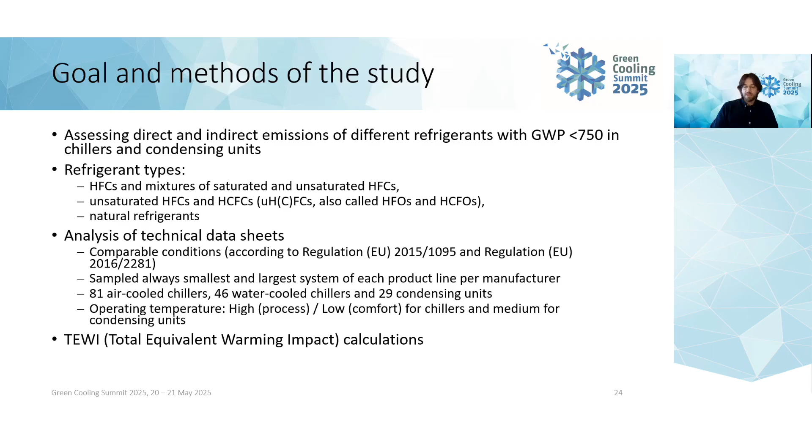The metric that we looked at, and that's also where we needed all the information, was the total equivalent warming impact. This is what we wanted to calculate. It looks very big now, but it's simply the direct emissions plus the indirect emissions. The direct emissions are the amount of refrigerant that emits from a system over the lifetime and at end of life. These emissions are summed up and multiplied with the GWP to get a value in CO2 equivalents. Then you add the indirect emissions, which are the emissions from the electrical energy generation to power the compressor, also over the entire lifetime.

With this, you get the TEWI, which is not really the total warming impact, because some sources are missing. We looked into this later for the paper, but the TEWI captures a lot, so that's why we opted for it. The data we gathered was based on technical data sheet information and some published information, but also certain assumptions. You can go through the assumptions in detail; they're also in the report, but you might conclude you would have picked a different value. That's totally fair, and that's why I did some simulations to look into the impact of these assumptions and see whether they would change the result.

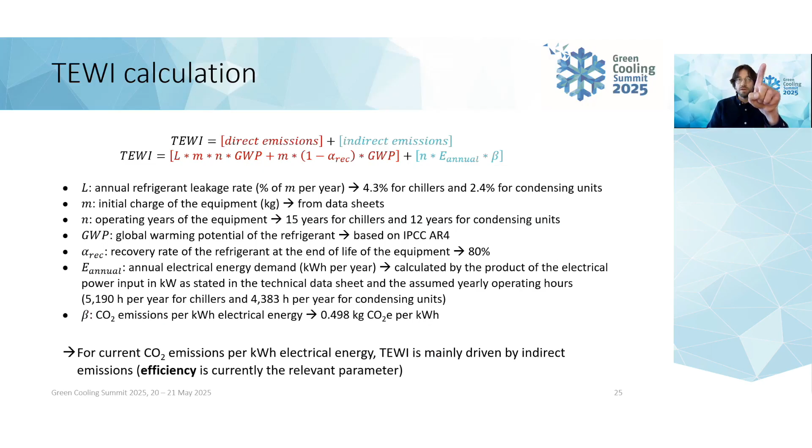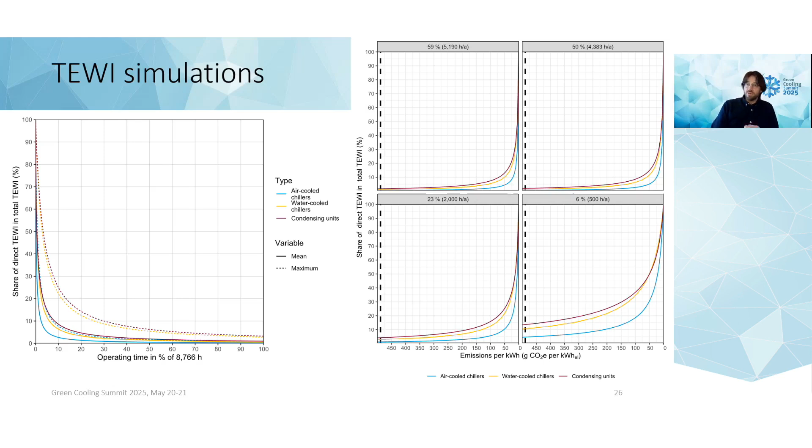So here you also see that it takes a long time for the electricity to get very green to have an impact here. Okay, so with this we can look at the results.

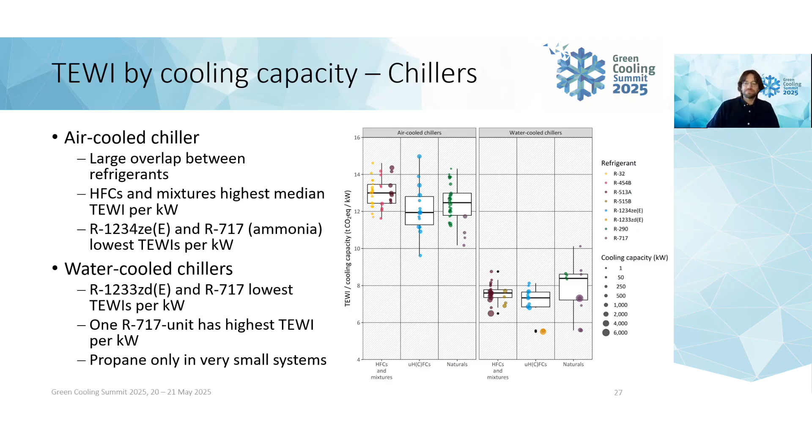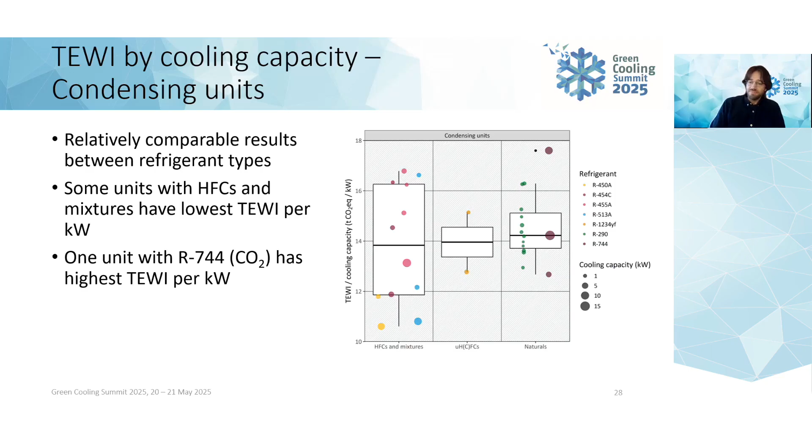But since the TEWI is not the only parameter when you look at emissions of refrigerants, we also looked at the atmospheric degradation products. So what happens to the refrigerant once it emits to the atmosphere? And generally for the fluorinated refrigerants, we can say that some purely degrade to HF, hydrofluoric acid, and CO2. So for example, HFC-32 just fully degrades to HF and CO2, but we have some fluorinated gases that degrade fully to TFA. It was mentioned before, 1234yf only has one degradation product, that is TFA, which is quite problematic.

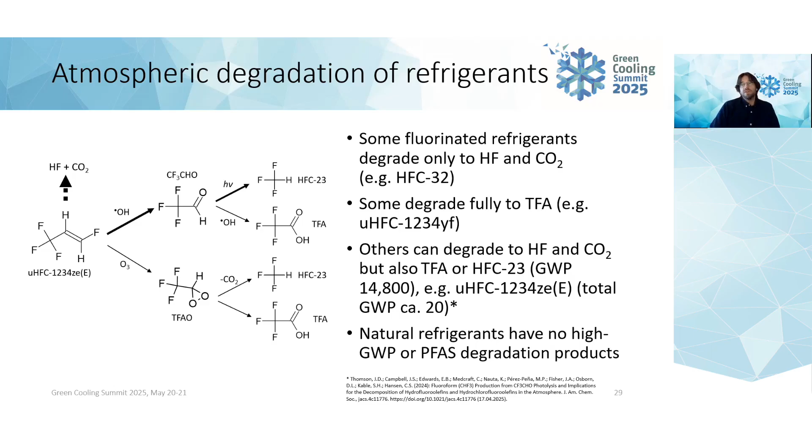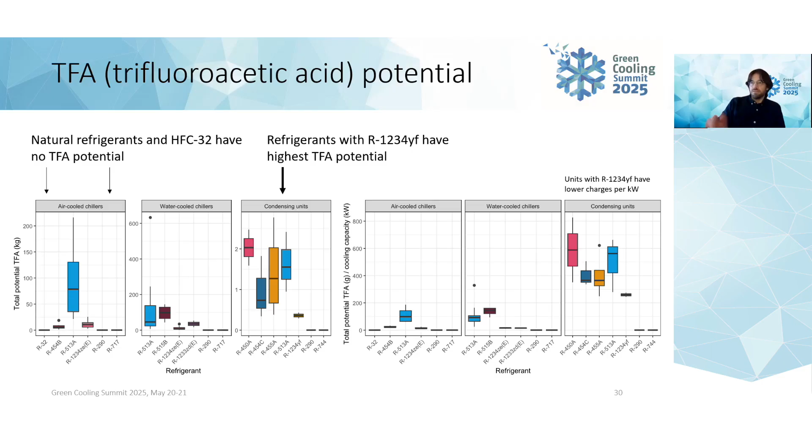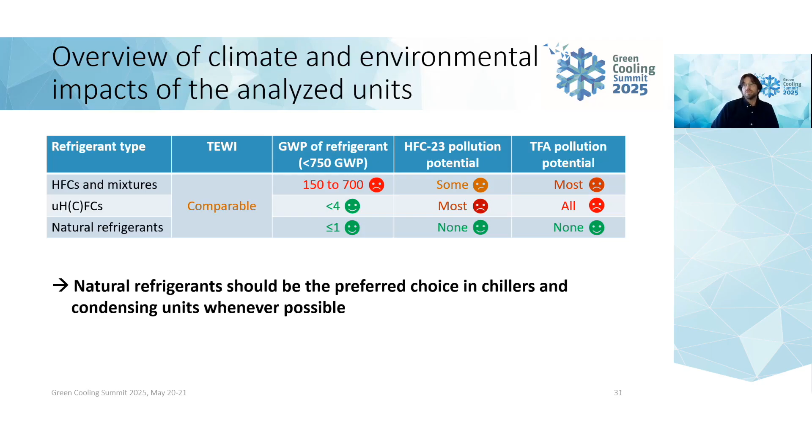For TFA, it's comparable again. The HFCs and mixtures, almost all of them have TFA potential. The exception here would be the HFC32. All of the unsaturated HFCs and HCFCs can create TFA, and again, none of the natural refrigerants can do that. So, if you look at this for the systems we analyzed, the result should be that natural refrigerants should be the preferred choice in chillers and condensing units whenever possible, because they do not come with this climate or environmental impact. I think that's it from my side.